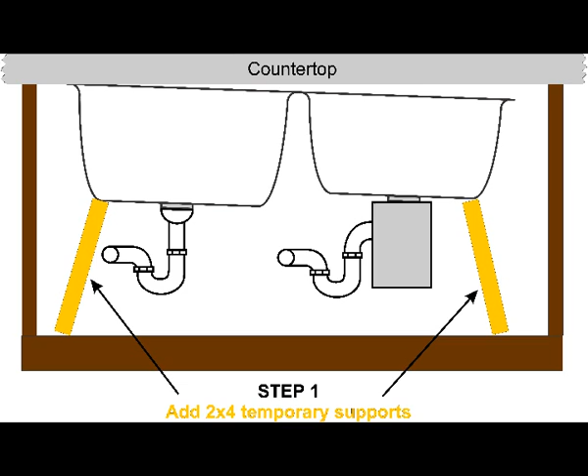Step 1. Immediately support the bottom of the sink with 2x4s to prevent further damage to the drain system or garbage disposal. Be cautious not to dent the sink bottom by forcing the 2x4s into place. Step 2. Investigate whether the drain connections are not cracked or damaged from the fallen sink. If damaged, additional steps will be involved for resetting the sink.

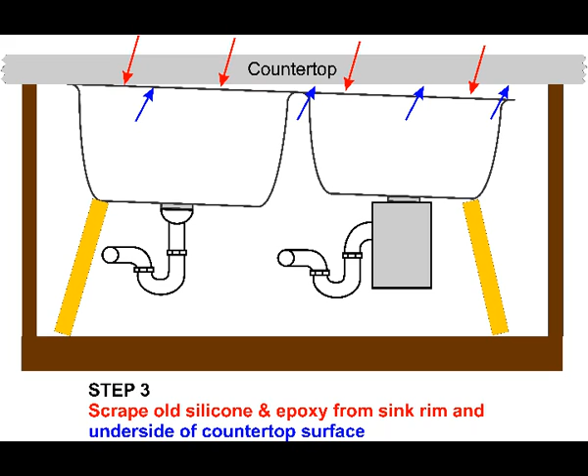Using a razor knife or scraper, clean the residual caulk, epoxy, or whatever previously was used to install and seal the sink from the top edge rim of the sink. This is the area of the sink that is hidden under the countertop. Next, using acetone or rubbing alcohol, clean the underside of the countertop where previous support mechanisms were applied.

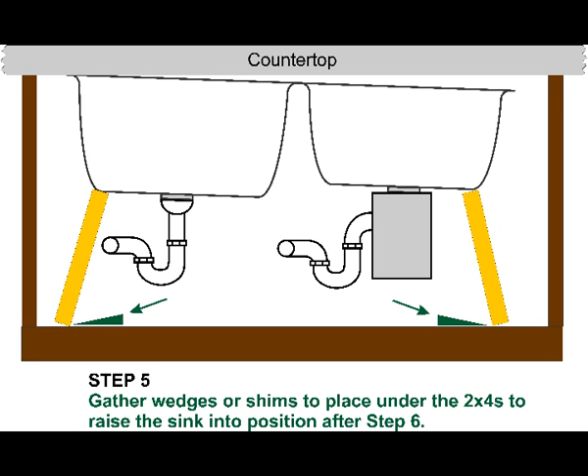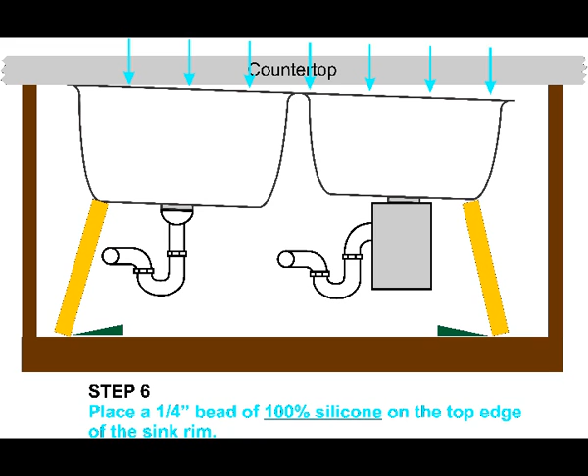Before proceeding to the installation stage, ensure that you have sufficient shims or wedges to support the increased height of the 2x4s needed when the sink is raised to the underside of the countertop. To begin reinstallation of the sink, first place a 1/4 inch wide bead of 100% silicone on the center top edge of the sink rim all around the rim of the sink. Do not use any silicone derivatives using latex or other additives. Use only 100% silicone material to prevent leaks and failure.

Raise the sink up to the underside of the countertop and position the sink so that the interior is balanced in the opening from left to right as well as front to back. Support the sink with 2x4s used earlier and shim or wedge into position under the bottom of the sink bowls.

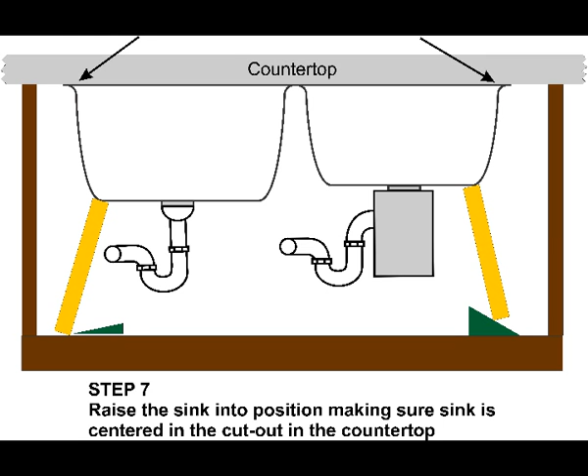Now that the sink is positioned and temporarily supported, it is time to install the E-clips to the underside of the countertop. The placement location for the E-clips on the underside of the countertop should be identified next, as these areas must be thoroughly cleaned using acetone or rubbing alcohol to ensure maximum surface adherence between the epoxy and the countertop material. The underside of the natural stone countertop has a residual stone slurry embedded in the nooks and cracks from the original slicing of the 2 cm or 3 cm slab from the quarried block. The epoxy will release from the countertop material if the underside of the countertop is not properly cleaned.

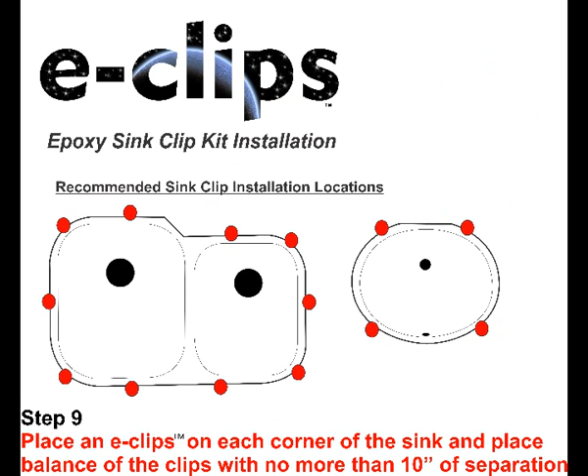The E-clip should be installed on each corner of the sink and in between the corners, allowing for no distance greater than 10 inches apart. Once the locations are identified and cleaned, the epoxy can be mixed. The epoxy will begin to harden in 30 to 40 minutes, so preparations must be completed prior to mixing. Organize the E-clips on a floor or counter to allow for a panic-free access when applying the epoxy to the back of the clip base, and then in the proper position on the underside of the countertop.

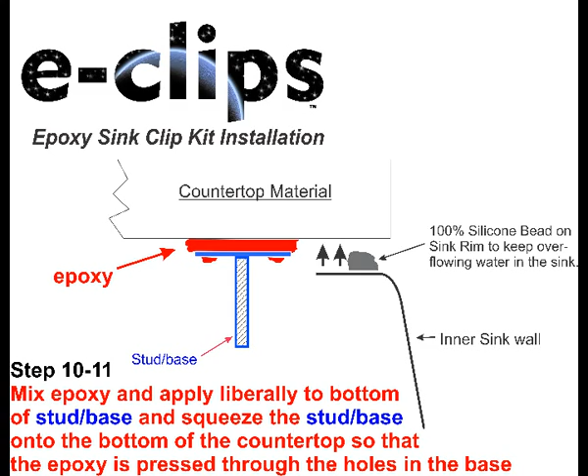Securely push each clip to the underside of the countertop, causing the epoxy to squeeze through the holes in the stud base of the E-clips. The epoxy in the stud base holes increases the surface area adhesion, giving the epoxy a better grip between the countertop and the E-clips base. Once all the E-clips are installed, allow for the epoxy to cure over the next 24 hours. Premature stress on the epoxy will cause failure.

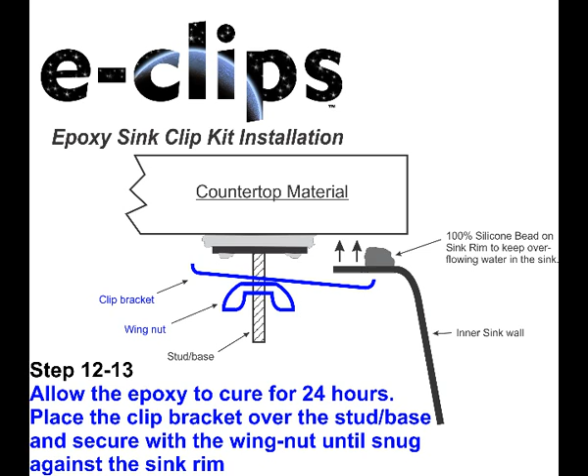After curing the epoxy for 24 hours, the E-clip slotted bracket can be placed over the stud and secured with the wing nut. Tighten the wing nut down so that the end of the bracket securely draws down onto the sink rim. Do not over torque, just snug the wing nut into position. Now the 2x4s and the wedges can be removed and the under counter details should be completed.

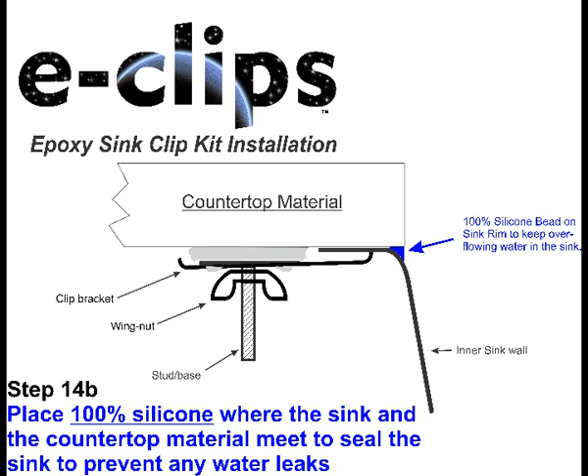The final step is to place a 100% silicone seal around the interior of the sink bowls where the sink rim meets the countertop. There's no need to over-apply the silicone. The point is to create a smooth, non-detectable seal that prevents water from going between the sink rim and the underside of the countertop material.

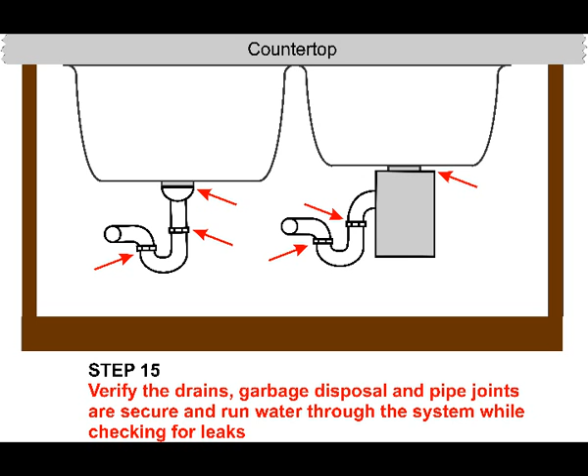Finally, verify that the drains and the garbage disposal are secure and test the sink and drain system with a water test. It is good practice to re-inspect the drain system over the next several days to verify that no subtle cracks or leaks have evolved from the sink originally dropping. This concludes the installation instructions for E-clips.